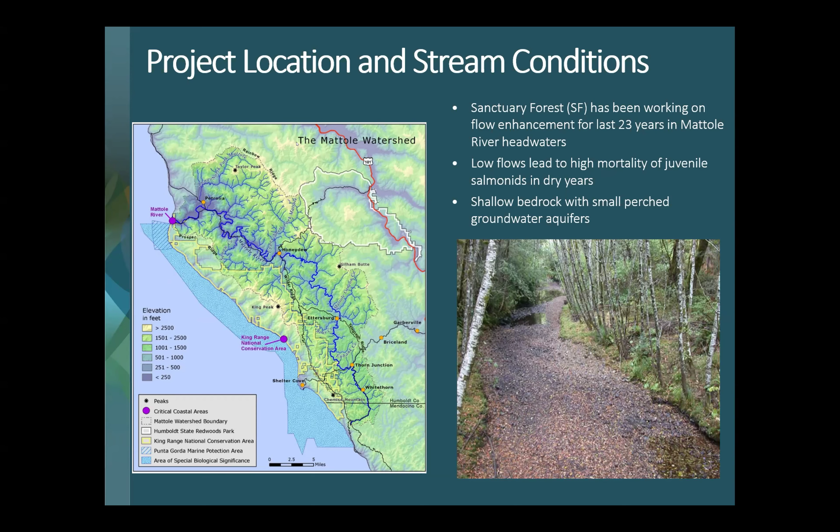So the primary goal of this project was to improve rearing habitat for juvenile salmon and steelhead during the dry season. So really that period of July through October. Some years a little longer, some years a little shorter, but it's the time in our Mediterranean climate where we do not get precipitation. Additional benefits include enhancing riparian forest health and fire resiliency, creating green corridors or enhancing those corridors, habitat for other aquatic species, especially amphibians, and then also water security for downstream human communities.

In the Vanauken Creek watershed itself, there are no human consumptive uses. It's really managed sustainable forest land, but downstream, after Vanauken flows into the Mattole main stem, you have some human consumptive use on the way down the river.

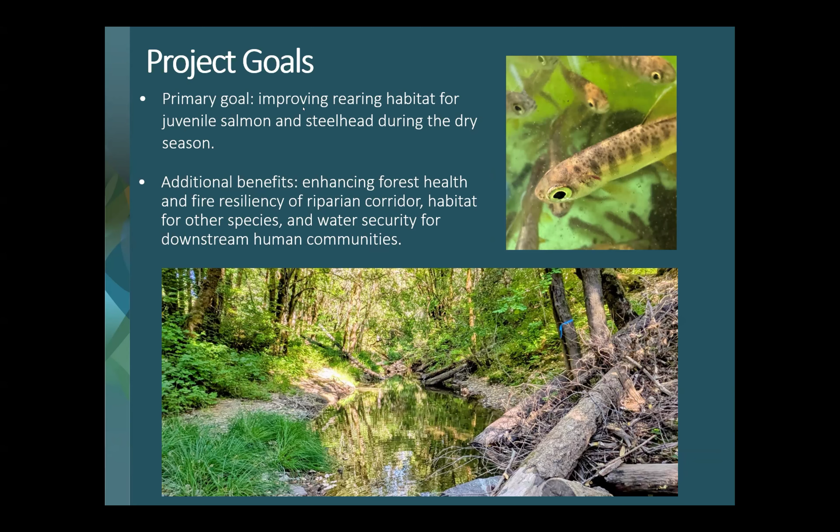And so just a little bit of background on the flow enhancement strategies that Sanctuary Forest in partnership with Stillwater have implemented over the last several decades. Their program really began with storage and forbearance. You can see here on the right, these are schematic figures showing how each of these four flow enhancement strategies impacts the hydrograph. So, again, this is schematic, but the unimpaired hydrograph in green and the current impaired hydrograph in black.

So, what are those impairments in the Mattole? Really, I think the broad, heavy-handed forestry, starting in the 40s and really going to current, is probably the largest driver of this impaired hydrograph. So rather than old growth forests, you have second growth, third growth, a lot of even-age management. There has historically been quite a bit of clear cutting in some of these watersheds.

And so that results, also the roads associated with that management, results in higher runoff rates, and then also a lot more evapotranspiration during the spring and summer months, where those even-aged forests are using a lot more water than old growth forests would have. The human consumptive use as well definitely impacts the base flow here in the dry season. So, straws in the creek and springs.

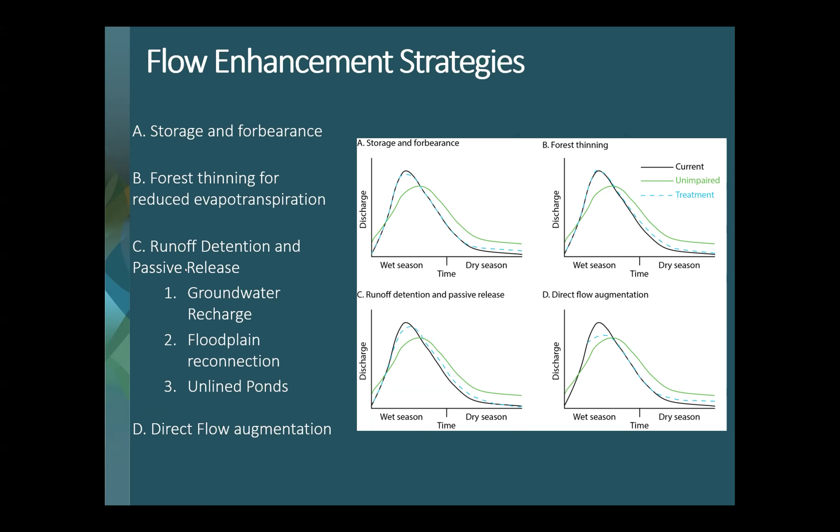So our most recent flow augmentation project is the Vanauken pond project. Here's a photo of the two ponds that were constructed in 2025. They total 7.8 million gallons of off-stream storage. They are lined with an HDPE liner. These are filled with rainwater and sheet flow only. So we don't have a water right for this project. This is an area that typically gets 80 inches of rain a year, so a lot of precipitation. I think in other areas you likely need a water right to fill these ponds.

And so then water is released from these into Vanauken Creek through an infiltration gallery. We'll discuss that more on future slides. This project cost approximately $2.5 million, and it was funded through the Department of Water Resources. And the target flow release for this project is around 30 gallons per minute, with some excess water available depending on conditions.

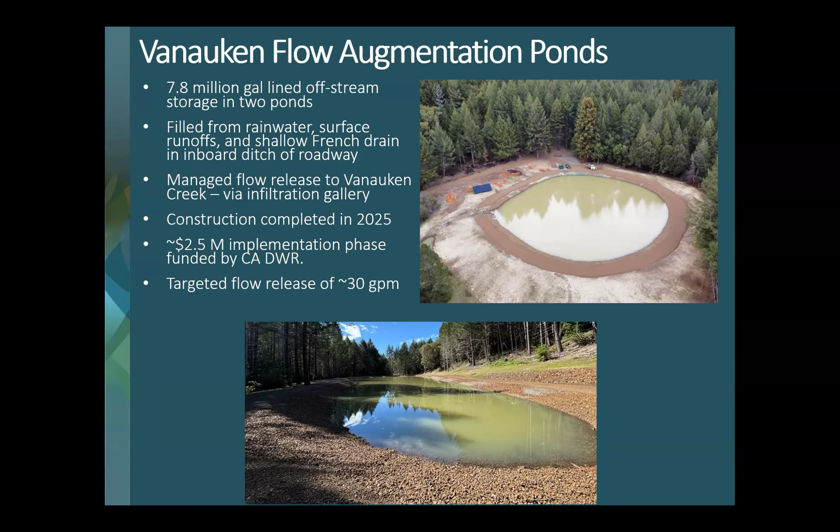So one thing that we've done on these projects: there was a lot of pushback from our client, Sanctuary Forest, and other restoration practitioners and agencies as far as trying to get more longevity out of lined ponds. And so what we have done is we've started covering the surface of the liner with gravel. And you can see here on the left, this is actually not the Vanauken pond. This is a smaller 1 million gallon pond in a nearby tributary.

And so what this looks like is the pond, you put in the pond liner, you put geotech fabric over it, and then in this case we had a bench cut into the inner berm of the pond, and then filling this upslope with about 6 to 8 inches of gravel on top of the liner.

This here is one of the Vanauken Meadow Pond as we were starting to put the gravel topper on. So these ponds, the entire ponds are lined. We use a 1 to 3 inch subangular drain rock, and this is placed again on top of geotech fabric. And in this case, obviously, you can't place it with an excavator. So this is placed with a rubber track skid steer. You basically start putting the material on, create a path for yourself, and fill it on out.

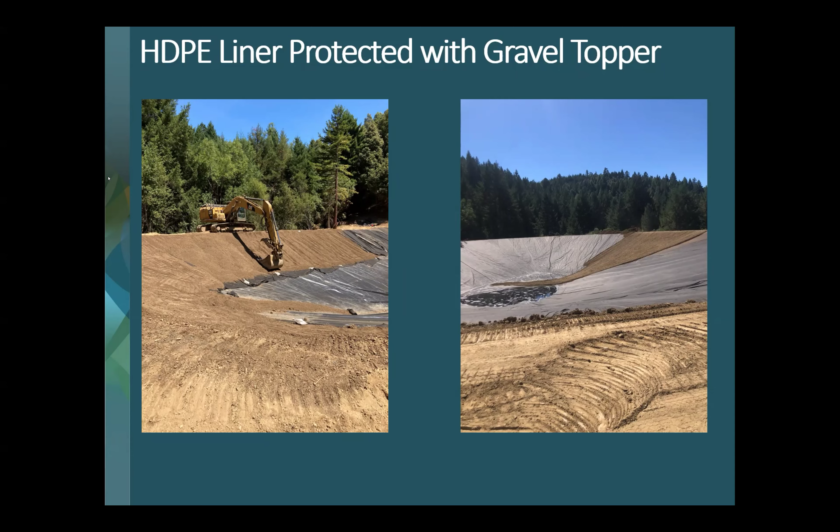So then a little bit on the infrastructure. Obviously, we try to reduce the amount of infrastructure, but in a lot of cases, there's just constraints on the site. In this case, we did not have a good infiltration gallery location that was down gradient from the site, so we needed some way to pump water, not way uphill, but a little bit uphill. So we have an off-grid system, so solar array, battery backup, and inverter.

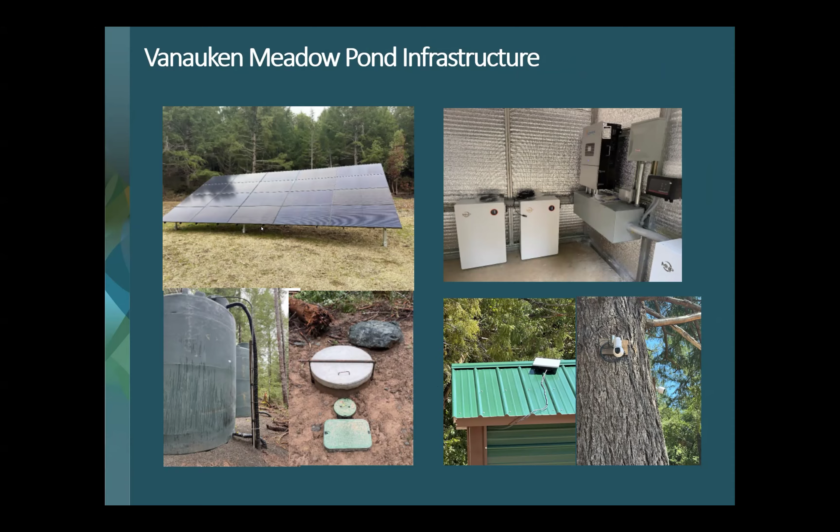And then we pump water to some holding tanks. And then from the holding tanks, it drains into here, our dry well. It would be dry before we put water in it in the late spring, summer. Valve and meter. And then we also include a little security component.

For the east pond, this is the second pond, a little bit smaller, gravity is working in our favor on this one. So we have primarily a siphon system that just takes water out of the pond and into the infiltration gallery. But we did want to guarantee that siphon was always functional.

So we created this pump assist system. And you can see over here on the right, this is our intake. This is the standard siphon intake, and then this is a pump assist system. And so this pump will turn on for a few minutes every day to ensure that the siphon is fully primed and will not fail.

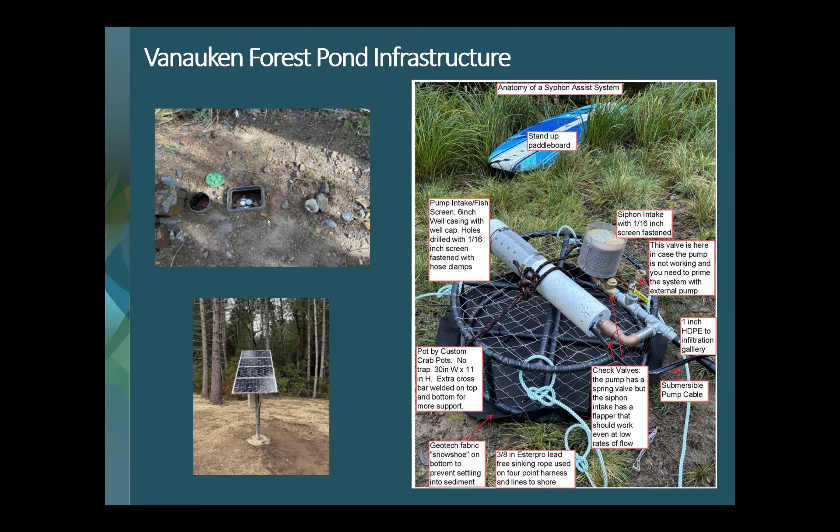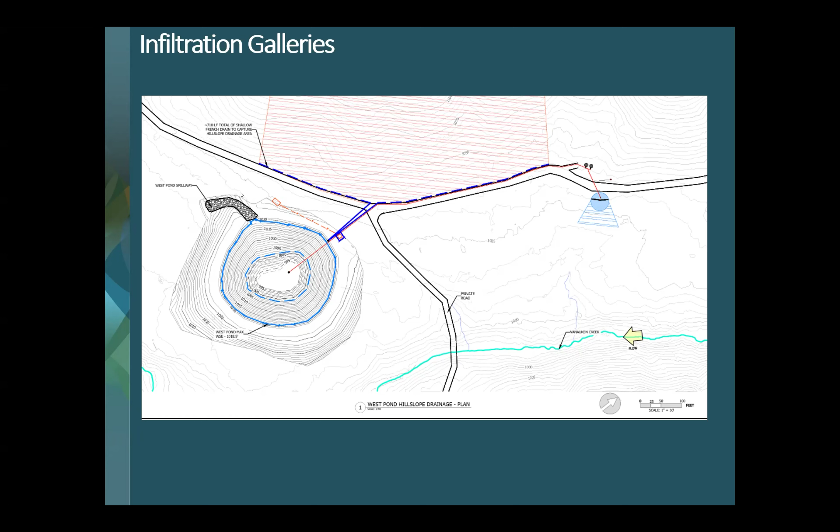So this is a little more detail of what that infiltration gallery looks like. Plan view here, just a pretty simple 2-foot diameter cistern with some wings with drain rock. You could see here in the plan, this is more of a section view, but yeah, so the water enters the well and then is able to infiltrate across about a 40 plus foot wide area.

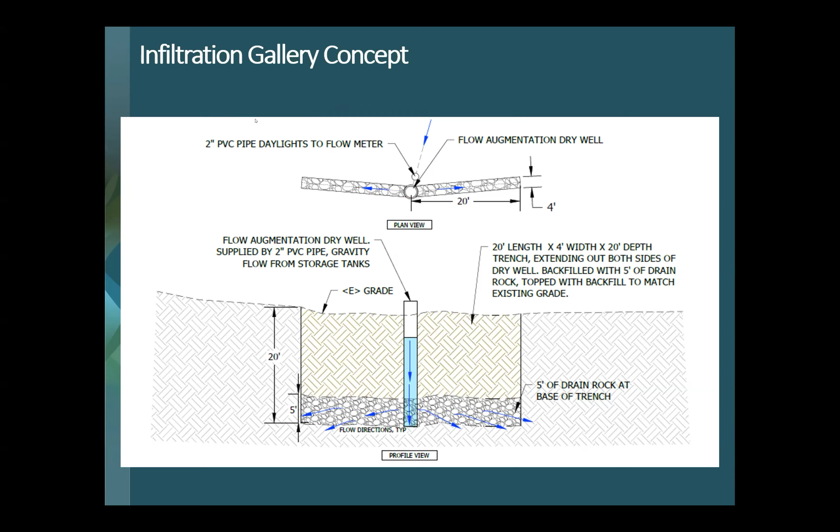And we dug down to approximately bedrock, so a fractured sandstone bedrock here at about 20 feet below ground surface. So jumping over to a different project, and really where we got the idea for the Vanauken project, is the Marshall Ranch project. And so this is in the Redwood Creek watershed, which is a tributary to the South Fork Eel.

In this project, we also have an infiltration gallery. We're releasing about 30 or 40 gallons a minute into that. You can see here the blue dot. And so this is what the water did after we released it. We had two primary flow paths, but the water really spread out across a pretty broad terrace along the bedrock interface and provided this, I would say, non-point source flow enhancement benefit to Redwood Creek.

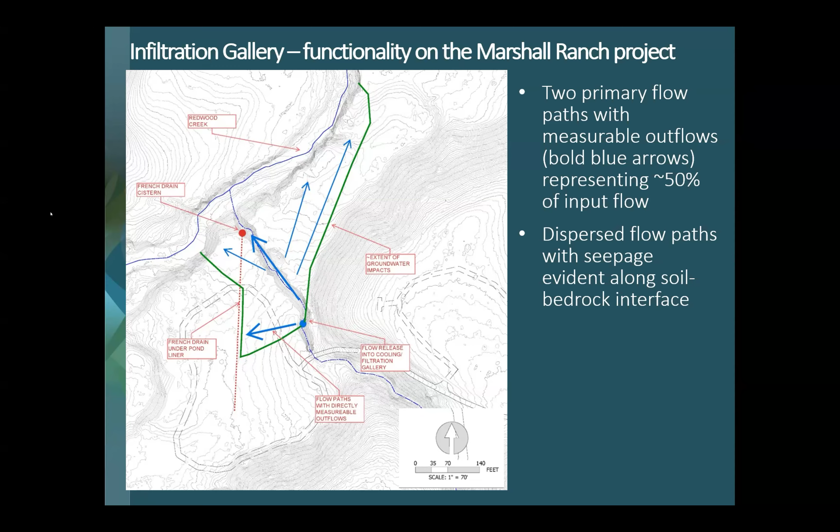So we're expecting the same sort of spreading of the water at Vanauken. We have a similar geology as far as depth to bedrock and soil type.

So pond monitoring, this is pretty simple, but we do have data loggers in the pond. They are sitting on a similar crab pot system to our other primary outflow intake. You can see someone in the project was an ocean person. These are the modified crab pots.

And then one thing I just wanted to mention is really one of the key kind of regulatory pieces of this is ensuring that these ponds don't become inhabited with bullfrog, which are invasive species. And so far we have not had any issues. The fact that these don't have a lot of vegetation around the outside and are drained down really heavy every year does not provide very good bullfrog habitat.

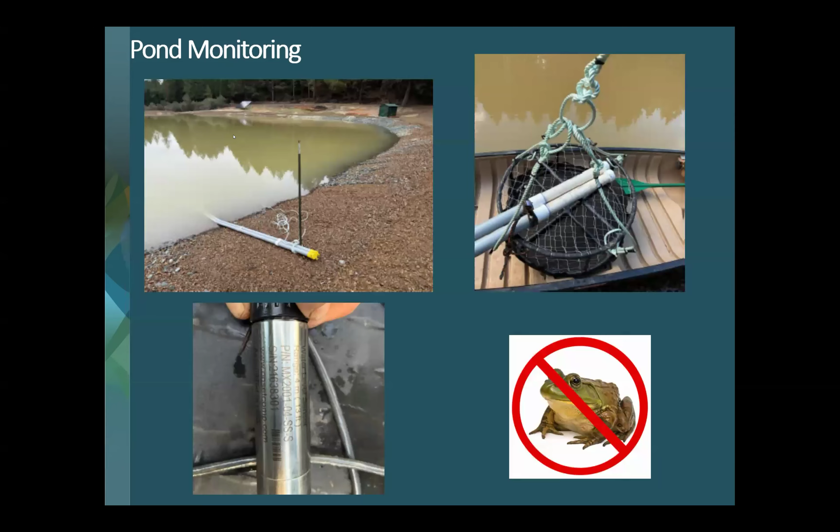In-stream flow monitoring is a key component of these projects. So especially water temperature, dissolved oxygen, and stream flow, upstream and downstream from the point of flow release.

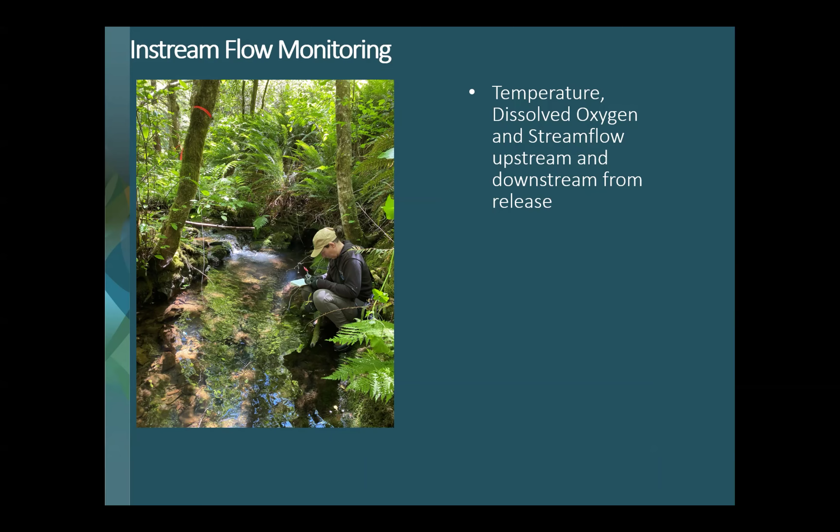And just kind of touching on some other project results. This is a photo from a nearby tributary in the Mattole, much smaller than Vanauken Creek, but similar setting and similar impacts. And so these photos compare conditions in early October in 2016 and 2024. These were practically identical water years. We were very lucky to have pre-project data from quite a while ago that had a water year that was such a good comparison.

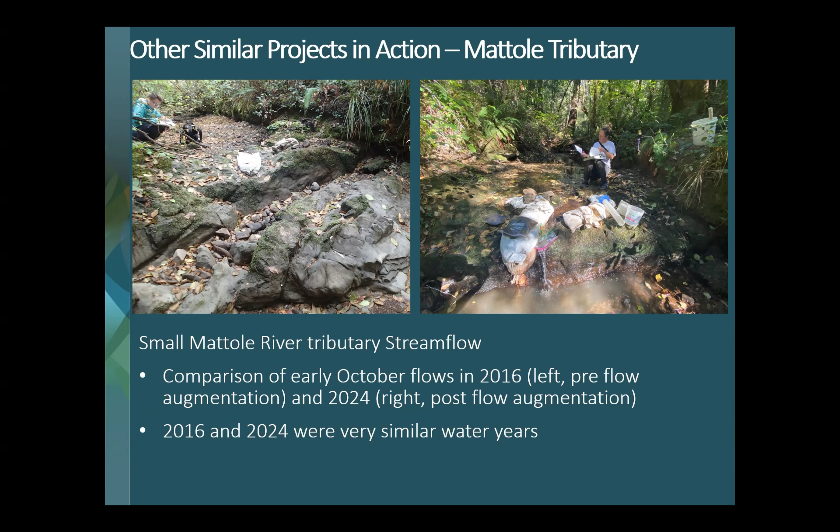And you can see, it's only a few gallons a minute, 3 to 4 gallons a minute, but it just transforms this creek from really a dry gravel bed. You can see, I think, a little pool here, but into a flowing creek where you can imagine the fish and other aquatic species would be thriving in comparison to this photo on the left.

And then some additional monitoring data from the Marshall Ranch project, which again is really just to the west, or sorry, just to the east of the Mattole in the South Fork Eel watershed in the Redwood Creek tributary. And this project here, Marshall Ranch project, is about 5.5 miles upstream from the confluence with the South Fork Eel. So we're really looking to improve habitat throughout that 5.5 miles with approximately 40 to 50 gallons a minute of flow augmentation.

We've run that project for 2 years now, and it's going quite well. This is some of the data from our first year of operations. You can see this upper graphic. The three upstream gauges all go dry at some point during the summer, and all of the downstream gauges maintain flow. Although it gets really low, they do maintain flow.

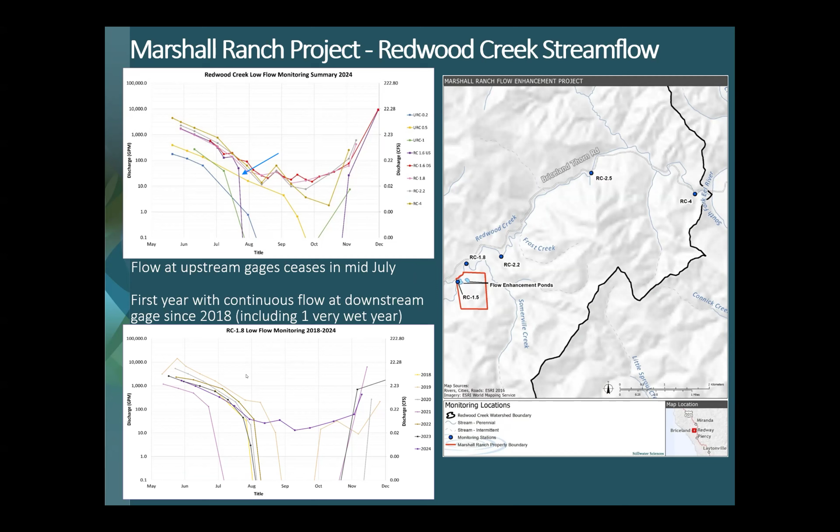Looking at just one of those downstream gauges, this is the one closest to the project here on the bottom, RC 1.8. And you can see that during the 7 years of monitoring data, 2024, our post flow augmentation year, was the only year where flow was maintained throughout the summer, even though we had this one actually really wet year, 2019. So this station was going dry even in quite wet water years, and our project reversed that trend.

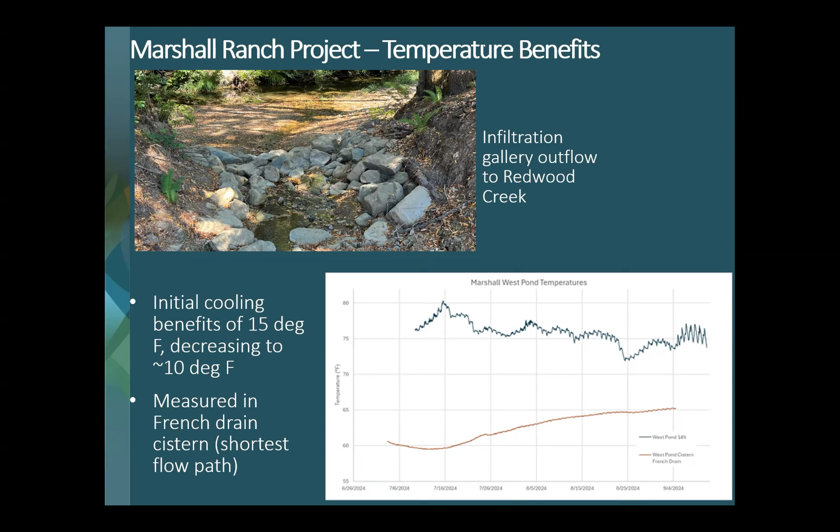The dissolved oxygen question is a little more challenging, or a little more nuanced. And so, what we found is that the groundwater, releasing water through an infiltration gallery, does moderate DO or bring it down below kind of what would be optimal for salmonids.

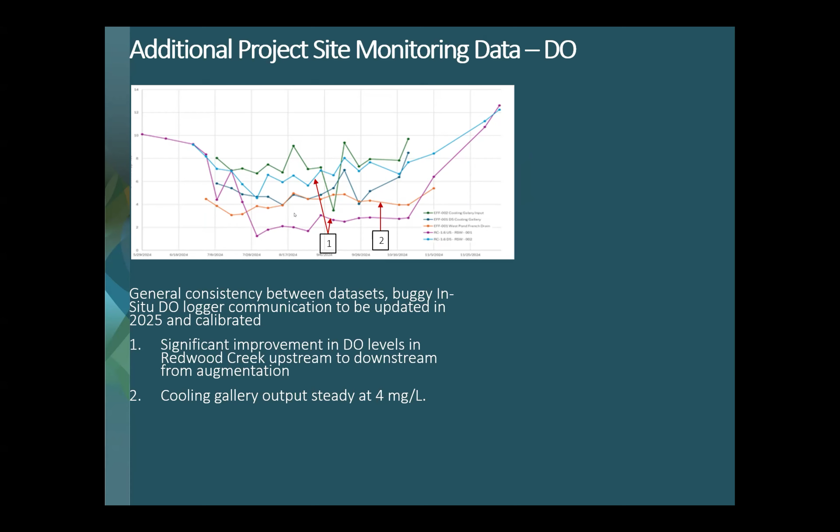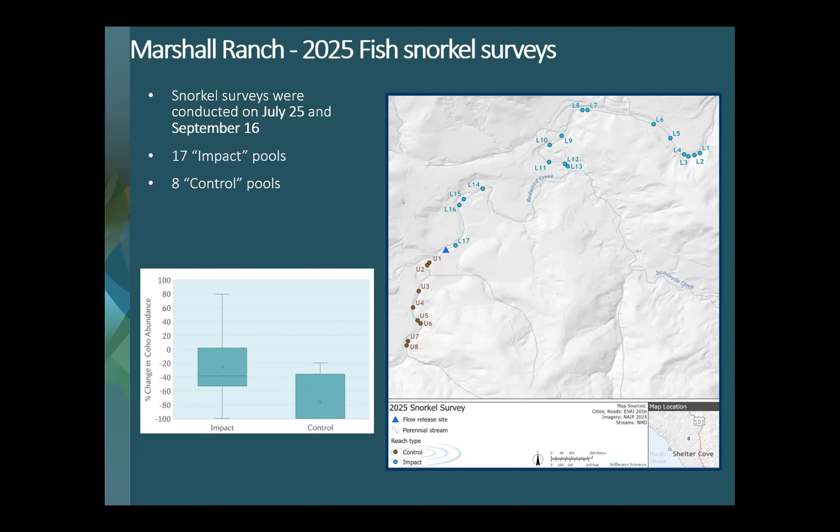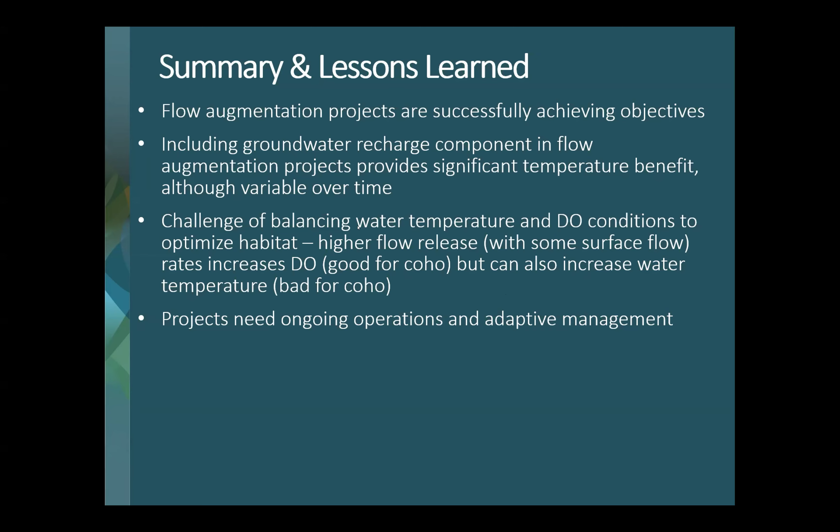So I think with that, that was my last slide, and so looks like we have a bit of time here for questions.

I see David. Oh no, just claps. I'll throw out a question. Oh. Hey, Michael. Hey, Jill.

What kind of scale do you see this particular treatment applied at? Like if you were to do it in other portions of a system? Yeah, I mean, I think it could be applied at various scales. There are certainly constraints, and so I would say that obviously with any project, cost is a constraint, and so bigger, you're just going to have a lot of cost in earth moving and liner cost, etc.